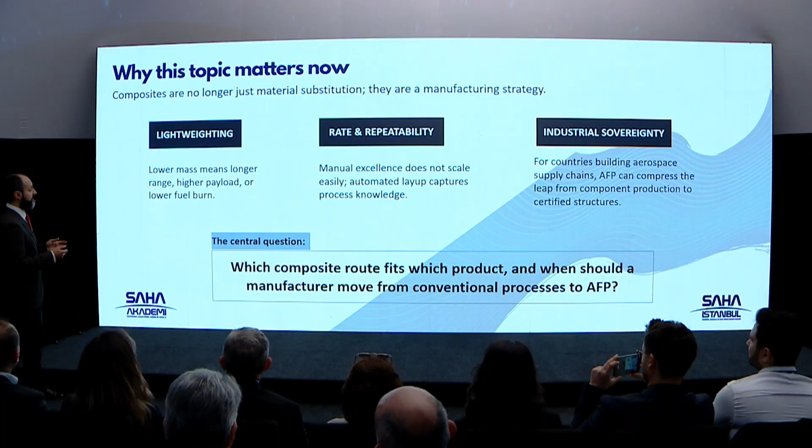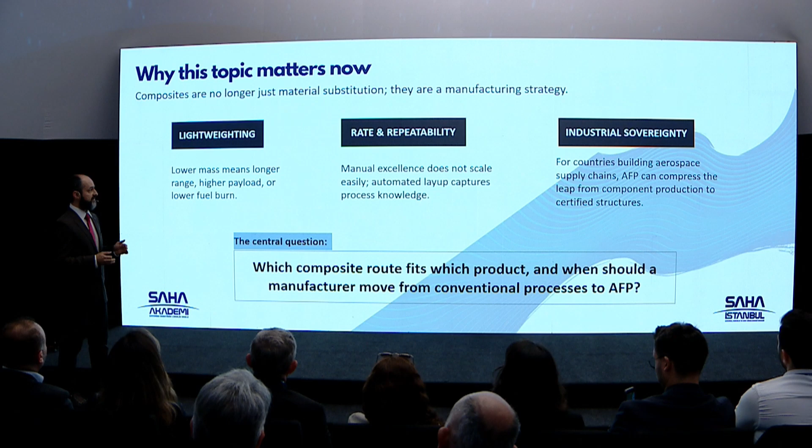Why does this topic matter now? This is relevant to aerospace and related fields. Weight is very important in the aerospace industry. We need to decrease the weight, and in order to do so, we need automated systems. As a high number of structures are required in the sector, qualification is required for the materials produced, and that qualification should be made through a system, not a person. And we need to be a pioneer; we need to increase sovereignty. For countries building aerospace supply chains, AFP can compress the leap from component production to certified structures.

My presentation will last for 30 minutes. I will give you some brief information about the definitions: what is composite material, hand layup, autoclave, etc. Then I will talk about AFP, then market reality, and then the financial screening and adoption in Turkey. I will be showing you the prices as well.

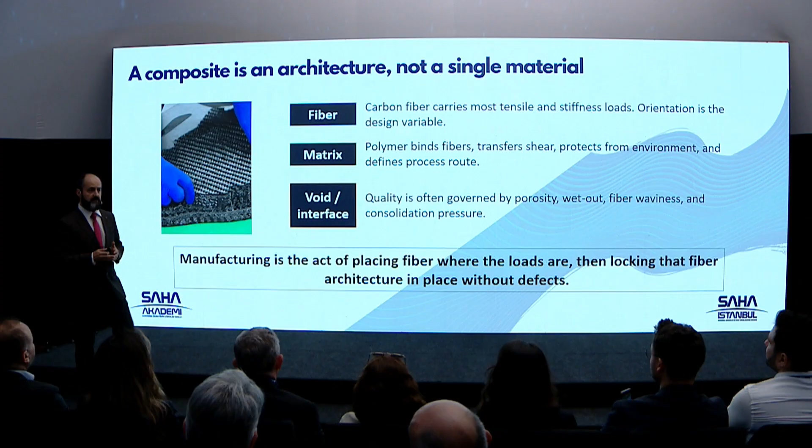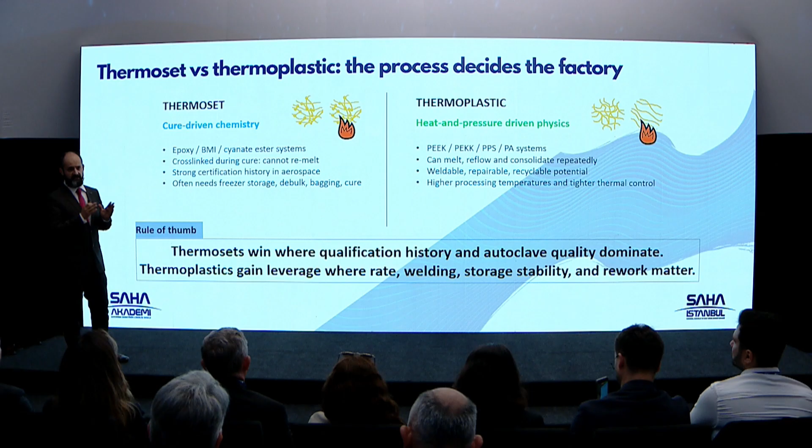This is a composite structure, and a composite is an architecture, not a single material. When we say composite structure, we mean a structure designed within the body of a helicopter, for example. Carbon fiber carries most tensile and stiffness loads. Orientation is the design variable. In the fiber you see on the screen, there is matrix inside, and we are looking at the defects as well. You need to know about the material. You're not just replacing it. You're creating a structure, you're creating an architecture. When you know about it, you know half of the requirements. And here we have a resin inside, thermoset or thermoplastic.

Thermoset is used on airplanes. We have been using them for a long time. They are cure driven. It's like a resin, and once it's hard, there's no going back. When there's an issue, there's no way to repair it. But thermoplastic is weldable, repairable, recyclable, and once you heat it, you can change the shape. When there is a problem, you can repair it. And as I said earlier, you can weld the structures to each other. Thermoplastic is a high-tech material, more advanced than thermoset.

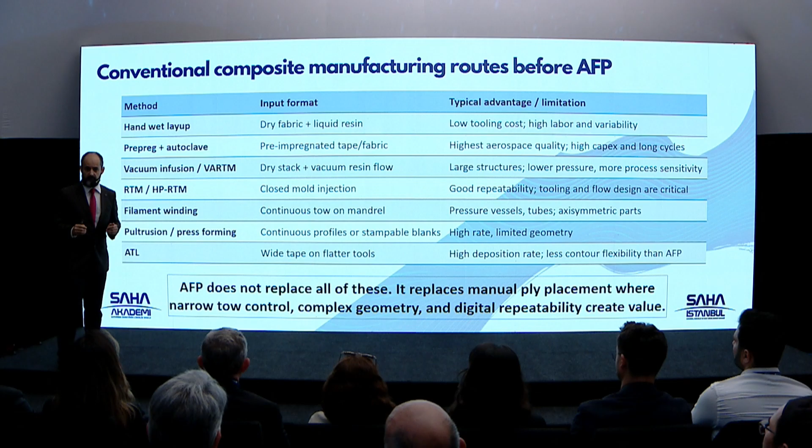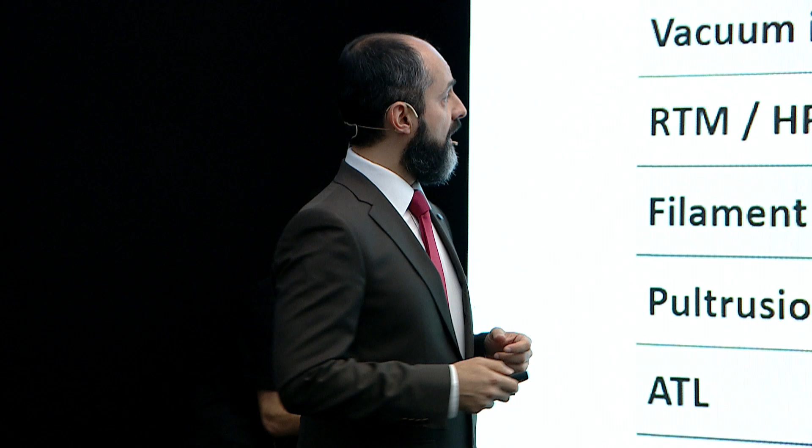Okay, conventional composite manufacturing routes before AFP. If we don't use AFP, what should we use? You can see here the methods and input format: hand wet layup. An operator comes and places the fiber, then infusion methods within the oven. This has low tooling cost, but it is totally up to the skill level of the personnel. After that, prepreg and autoclave. This is a little bit more expensive. There should not be any air left or any defect. You use the autoclave with pressure and high temperature.

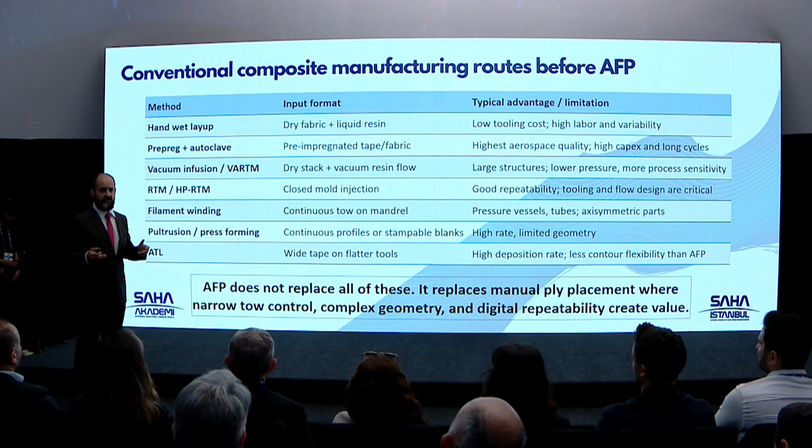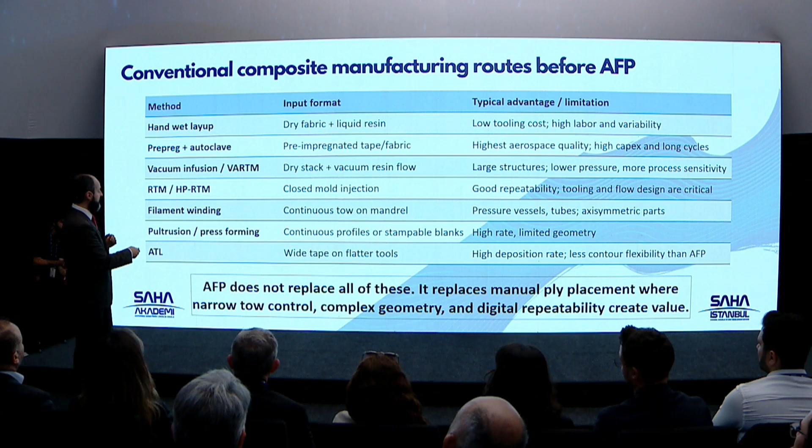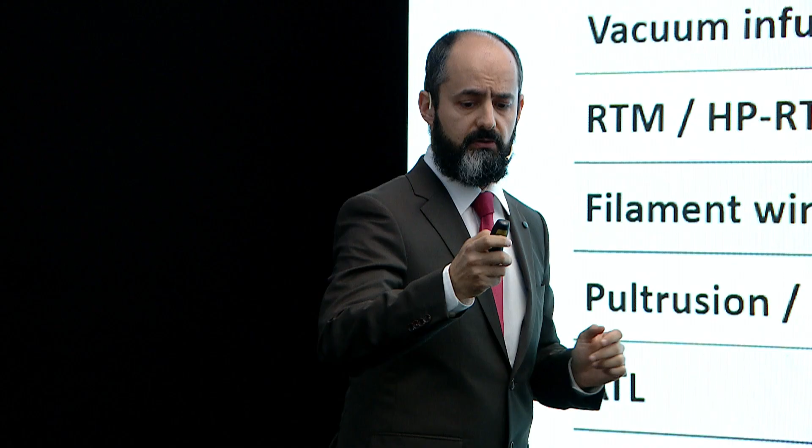We have vacuum infusion. This is for aerospace parts, a wing for example. You dry stack and then apply vacuum resin flow. It is for large structures, with lower pressure and more process sensitivity. And for asymmetrical structures, you use RTM and HP-RTM. This is closed mold injection, and it's a good method, but of course each has some limitations. Up to filament winding, there are limitations because of the operator or the process. Pultrusion is already being used in pipes; it can be used in continuous profiles. And ATL is automated tape laying. On a normal surface, you use a big head and place the fiber onto the surface.

As your complexity increases on the surface, AFP comes, because at this point you need to use a robotic hand. I will give you the details in a minute. When I say conventional thermoset route, we will use the thermoset. And what do we do conventionally? We take the fibers and we cut the textile and put them on a structure.

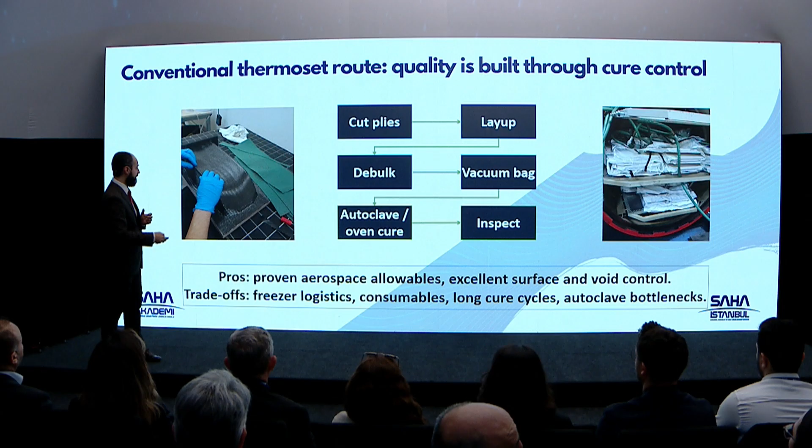Then on the right hand side we use vacuum bag, and curing happens, and under the temperature of the autoclave you cure it. This is all handmade and manually operated. From the beginning till the end, you have many waste materials because you cut it, and all the textile materials, they're in a specific size, and the remnants are the wastes.

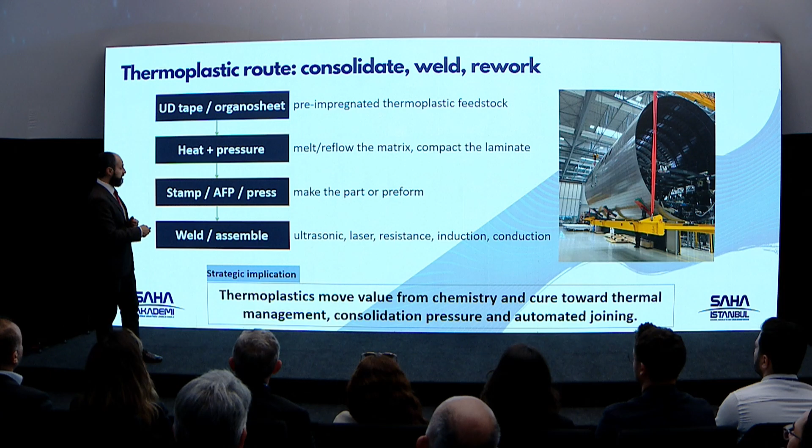Let me talk about the thermoplastic route. You can see here the body of an Airbus plane. They do welding on thermoplastic. You can't use thermoplastic in a dry format, there has to be a sheet structure because thermoplastics are hard in room temperature. You need to use it in UD tape or organosheet format, and these are suprastructures, and these are demonstrated projects.

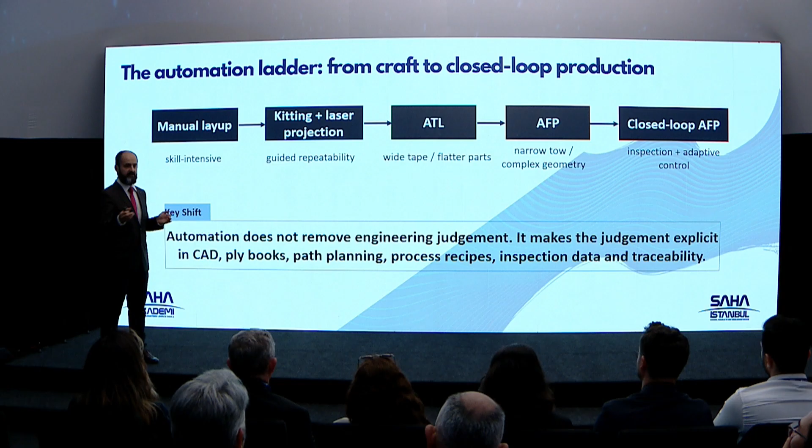And last but not least, closed-loop AFP with the inspection and adaptive control, this is going to be in a digital twin structure. You will get the scan data, you will compare it, and you will update the models. This is a closed-loop factory, and this is the closed-loop AFP method. You're not only bettering your manufacturing process, but also you are making the whole manufacturing structure a closed loop. This is the structure that I am talking about.

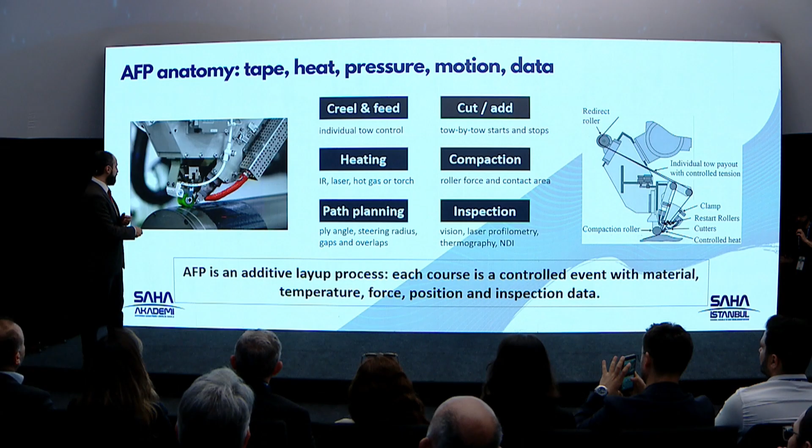On the right hand side you see the cross section, and here you can see the shape of it while placing. There's fiber feeding, and you see here some bundles, and there are rollers. We take the fibers inside. There might be either one fiber or hundreds of fibers, 30 fibers. It depends on the size of the machine. Small fibers. It can cut and it can restart. A complex geometry here. On top of it, not only placing but also complex placing methods can be used.

Steered fiber is another topic. How do we place the fiber at a certain angle, 40, 45, 20, 30 degree? In my doctorate thesis, I worked on that, and this structure is not 45 or 55 degree. It depends on the load that you have, and as a result of the optimizations, the fiber path is going to be designed according to your load, because there are cutters on top of it, and the cutters are cutting the material and the fibers, and the robotic arm can turn and they can prepare a fiber in the shape of C.

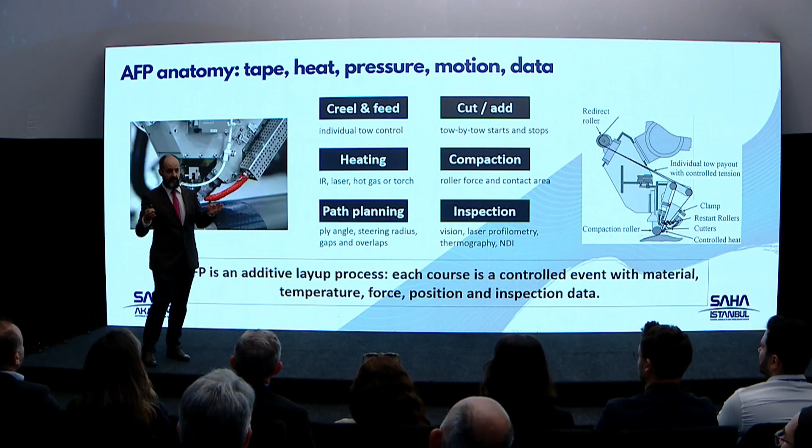But when we say flex coupling, when you pull it, it bends. That is the feature of composites. When you pull it, the structure starts to bend, and it's like the air surface, under that aerodynamic load, it starts to bend. And what AFP brings to us, it's a good technology, and it gives us advanced level designing ability. And this is the AFP method. You can look at all these pictures.

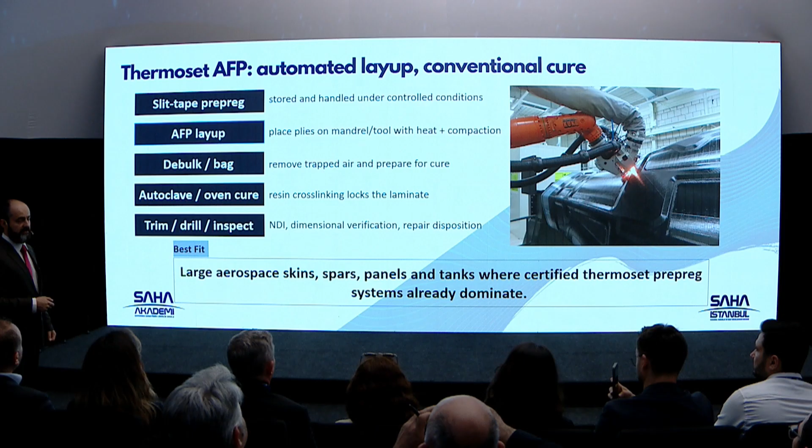You can see here the placements. The surface is quite complex. It would be very expensive to do it manually. You can't control whether the angles of the placement are right or not. It is certain that there would be gaps left, I mean the cracks.

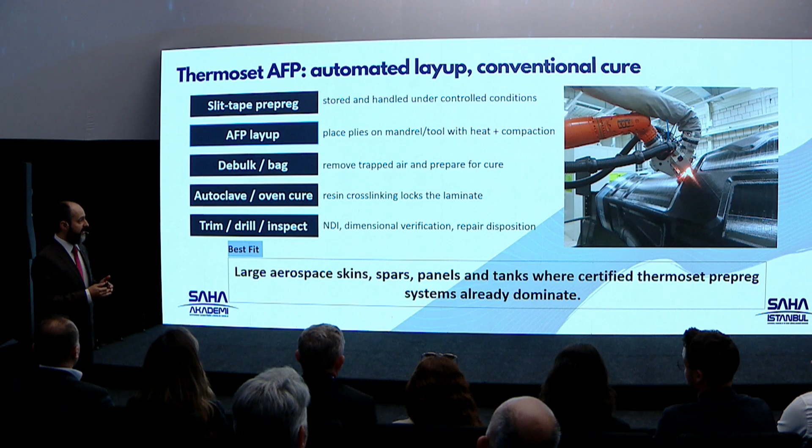Or when you put the structures on top of each other, if it is an aerodynamic surface, there is going to be a problem. So with resin infusion, the feature of the structure changes. This is not only a material, this is an architecture. There is resin inside, carbon fiber inside, and it has different percentages, 50 to 50, 30 to 60, let's say, and it behaves differently. So you use prepreg. You put it with the angles that you wish.

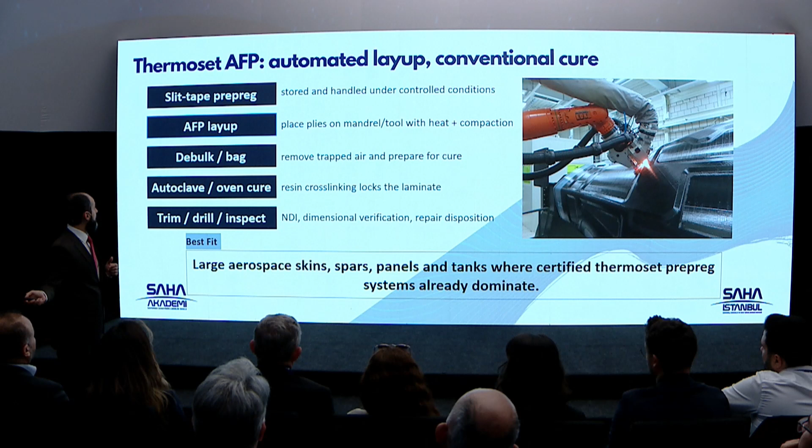If you have a spar or panel, okay, you can put it with thermoset. You define it to your computer, then that robotic hand goes and produces that. You don't see surprises. This is how we approach thermosets. Thermoplastics is the same. We can use the same procedure.

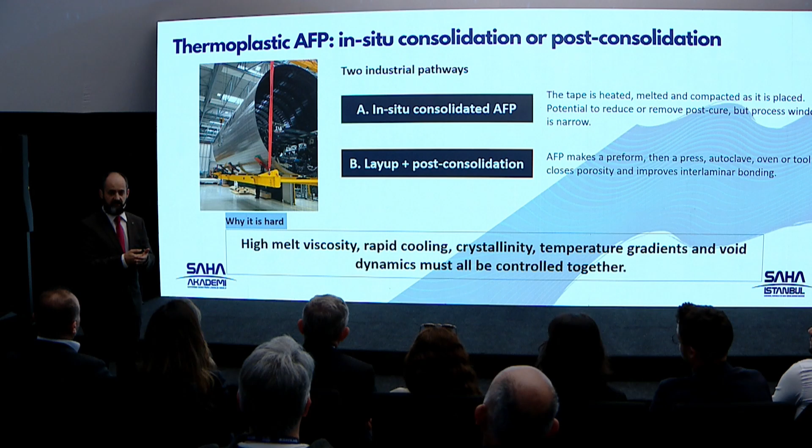This is a demonstrator project by Airbus. They go there and they weld it from the connecting parts. It might be ultrasonic or an external energy. They heat the points and then they can weld very fast. That is one of the features of thermoplastics. They can be cured very fast.

Apart from the aircraft, in most of the UAVs, this structure can be used in AFP. When you look at the structures in Boeing, they don't go manually. They use automated fiber placement, and good institutes mostly use this method. There are people in the world with serious experience in this topic.

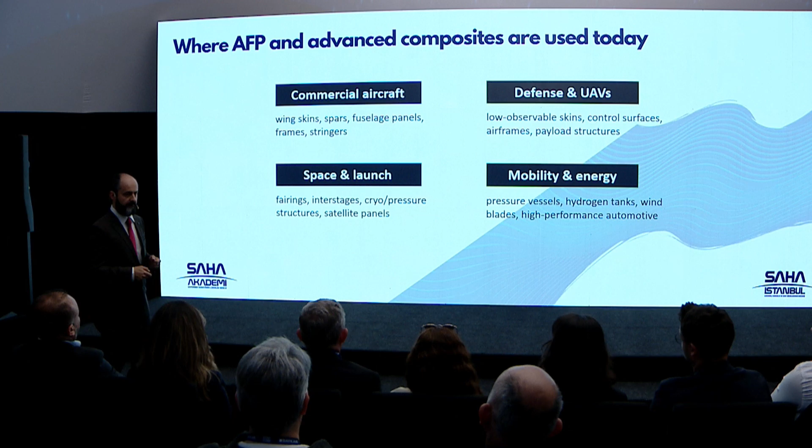And again, in the space launch, you saw these structures and hydrogen tanks. Hydrogen storage is another topic, and you need to do the calculations in order to be able to store the hydrogen, and such structures can be produced with automated fiber placement. In Sabancı University, they do have such a system. You can go there and use it. And in TAI, they do have some projects.

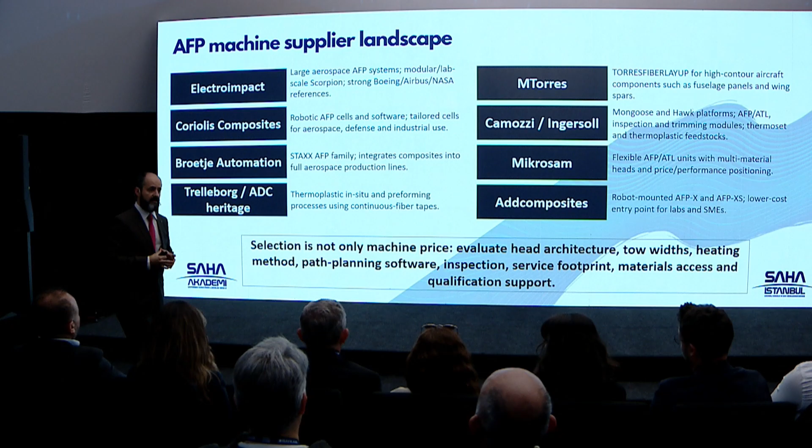And these are the companies that you can buy these robotic hands from. It's not only about buying the robotic arms. You need to know how to use it. And these structures are going to have different capacities, the cutting capacity, the turning angle, software, etc. This is all digitalized. Therefore, if you're going to choose one of them, then you have to be careful about all these criteria.

If we stop using the conventional approach, we have AFP machines. What do they do? We check our material yield. It's going to have narrow tow placement and optimized courses, and it can reduce scrap versus manual cutting, and it's going to leverage the labor because the operator supervises the machine and data rather than placing a ply by hand, and there will be certification processes in that regard.

So it's going to be very comfortable in certification as well, because the programs, the software, all the digital components can be defined. You're going to have quality records because digital path, force, temperature, and inspection data support will be able to repeat it, and it will also give us design freedom in steered fibers and in local reinforcement.

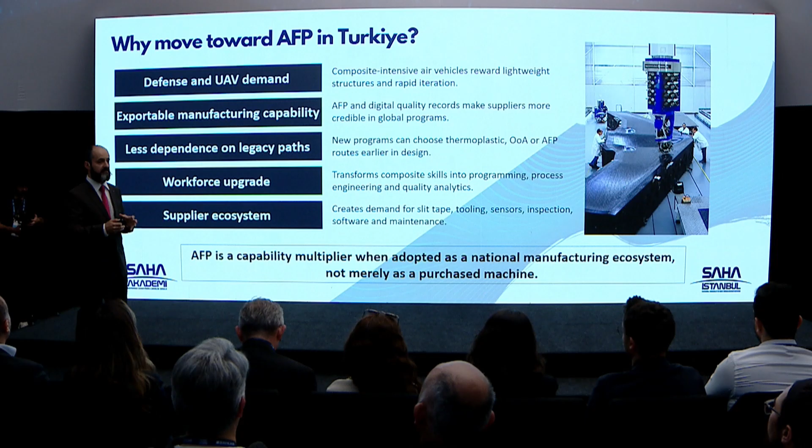If you're using thermoset, let's say, right now, and you would like to continue with thermoplastic, you can complete the transition period very fast because there is a defined process. You can change the materials. And the mentality here is that you need to train your workforce. These are all high-tech works. You need to provide training to your technicians, to your workforce. You need to upgrade them.

Rather than human beings placing the composite, you need to have a team with digital intelligence, a team which can adopt technological changes and developments.

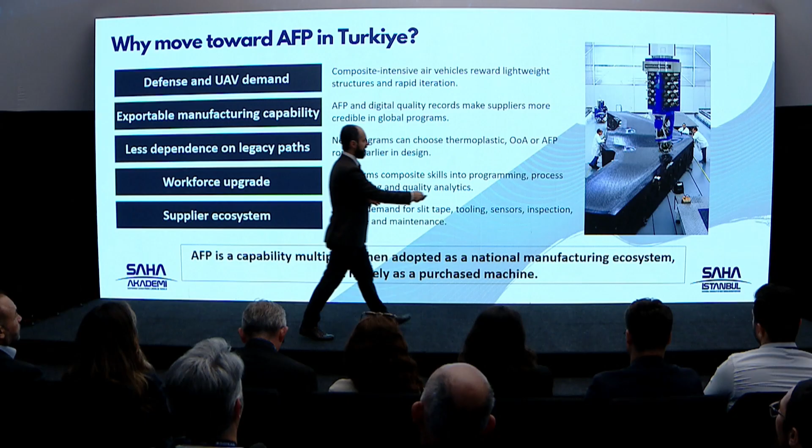As for the supplier ecosystem, once you place it here, while doing so, you can also do image processing on top of it. You take the picture of the structure digitally. While I place it, let's say I'm on the first layer. I do the first layer, then I have the visual of the first layer, and I know the points, the gap, the overlap, everything, and I can store it. Then on the second layer, third layer, I can also do the inspection and the placing, and I can interfere with the manufacturing process.

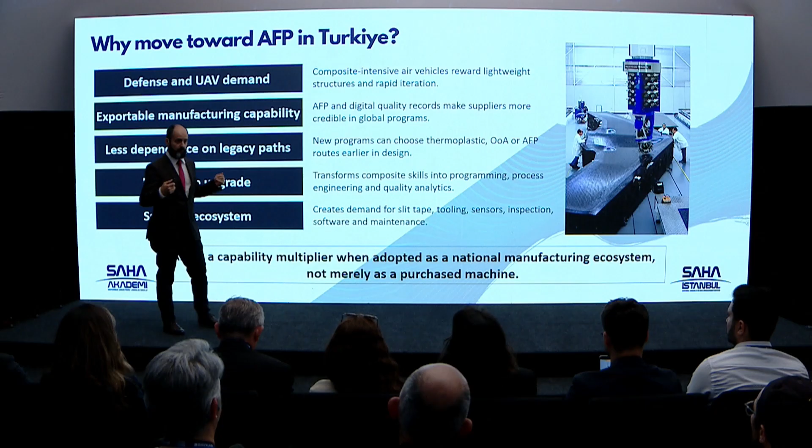Therefore, whatever you do here in the subcontractors - the secondary structures, the sensors, tooling, inspection, software, maintenance, slit tape - you're developing the subcontractors because the structure you use has specific requirements.

Okay, if you would like to start it tomorrow, what are we gonna do? The mentality normally is to go and buy that robotic arm. But that's not the topic here.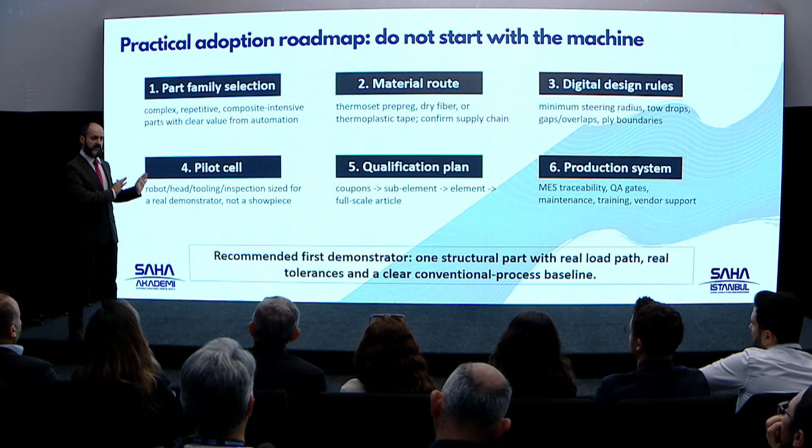You need to select the part, you need to define the part. After defining it, it might be a complex or repetitive or composite intensive part. Then you have to define your material route - thermoset or thermoplastic, which material are you going to pick up? Once you pick up the material, let's say thermoset, what are you gonna do?

Then what did we do? We defined the structure, then we defined a pilot cell, and we picked up this cell according to our design. This is what we would like to produce, and in order to produce it, this is the size, this is the shape, etc. And you can find it all around the world.

After that we are going to do the qualification. We produce something, then coupon, sub-element, element, full-scale articles. Then we turn it into a production system. If you start this program, what are the risks?

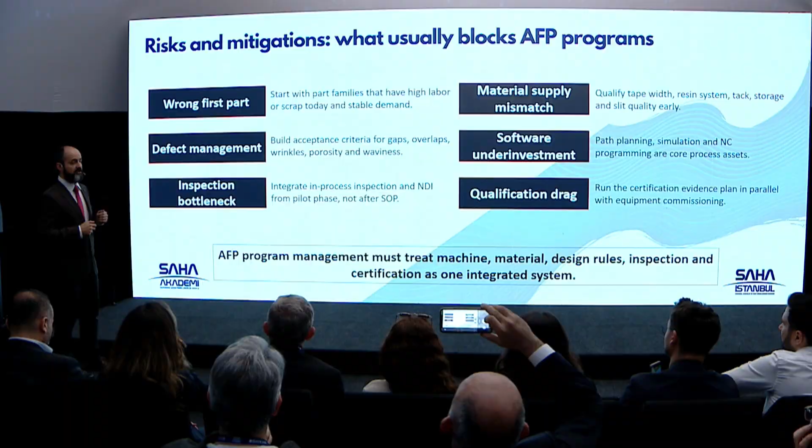Wrong first part is the biggest risk. You should start with part families that have high labor or scrap today and stable demand.

Material supply mismatch - you need to qualify tape width, resin system, tack, storage and slit quality early. It's going to be a part of the supply chain.

Defect management - you need to build acceptance criteria for gaps, overlaps, wrinkles, porosity and waviness. You need to inform the designer well. We need to correct the defects.

That's our design mentality. If we work with metal or aluminum, it doesn't matter - the life values, the temperature, operation temperature, we have some values coming from the production. Ultrasonic inspection, we define them.

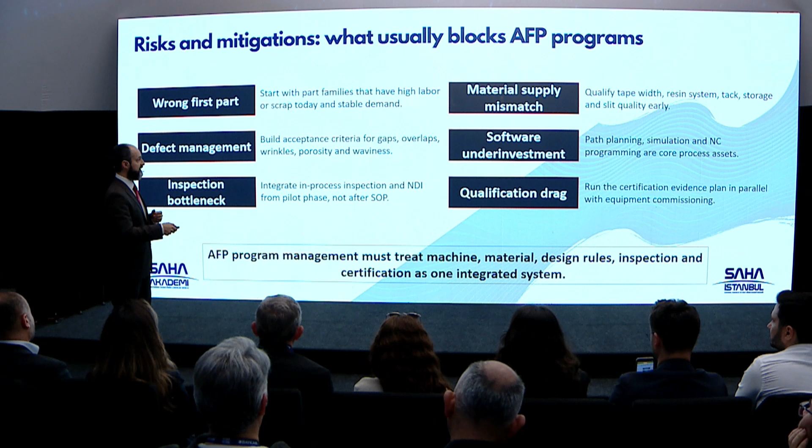Then software underinvestment is another risk. You need to plan the path and also simulation and NC programming, because they're going to be your core process assets. You need to train your personnel as well.

Inspection bottleneck - you need to integrate in-process inspection and NDI from pilot phase, not after SOP, because that is the main advantage of AFP. And qualification drag - you need to have a certification evidence plan.

These numbers that I give, I did the calculations and I took this data from public sources.